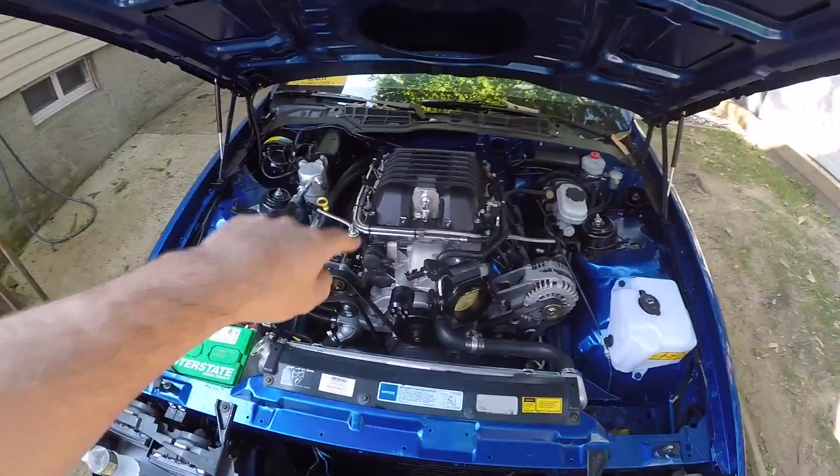Hey guys, welcome back. So today we're going to continue with the blower installation by installing the LSX Concepts race drive. A few other things I did since last video.

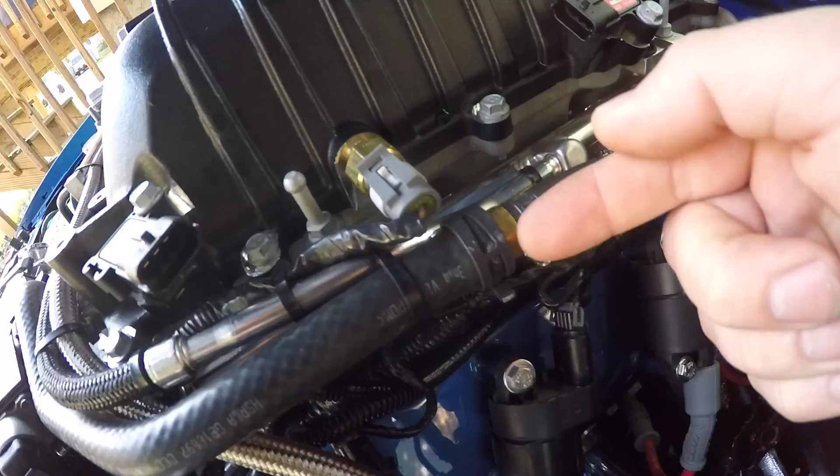I went and hooked up the brake booster vacuum line, as well as got a heater hose for that one in the back that was hitting the blower. For the booster hose, I'm actually using a stock ZL1 brake booster hose. The ZL1 side is a 1/2-inch hose, and then I stepped it down with a little adapter here to the 3/8 3rd gen size.

For the heater hose in the back, I went and picked up a long Gates heater hose with a 90-degree bend on the end. Right where it connects to the firewall, there's a 90 molded into the hose, and that clears the back of the blower.

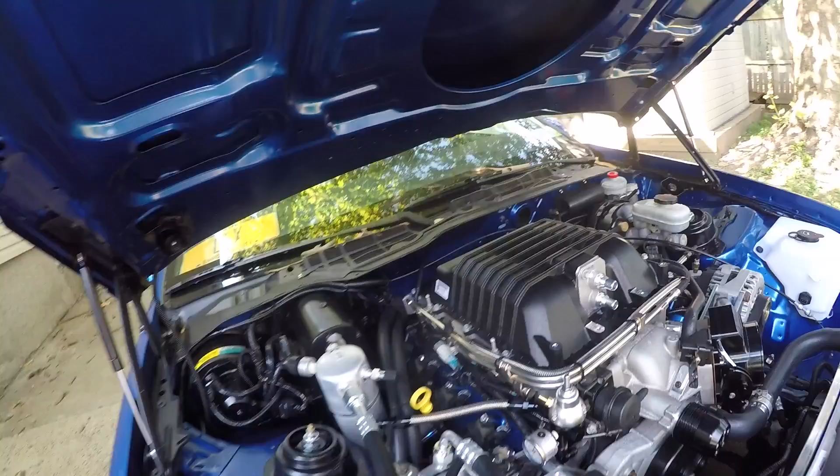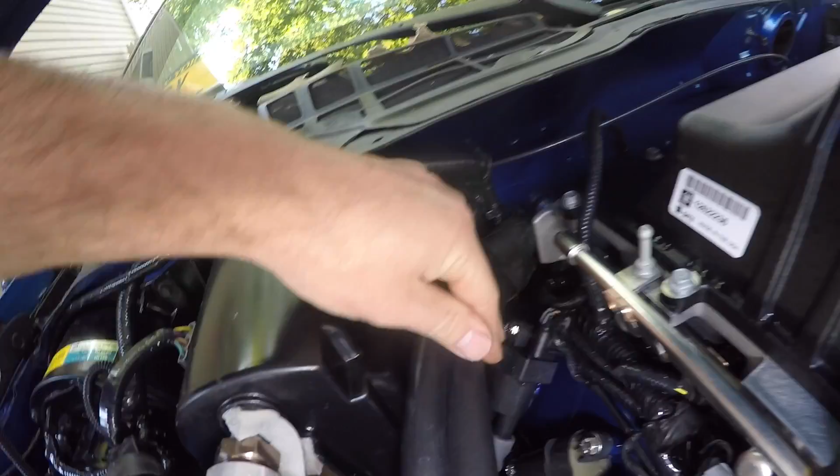It's a little tight on the other side still, it's just touching the blower. If I pull them off, they won't be rubbing anymore. So I'm going to see if I could get one of those band clamps and wrap it around here, and screw it into the side of the evaporator just to pull them over. But for now, I just put some friction tape around it to prevent any chafing.

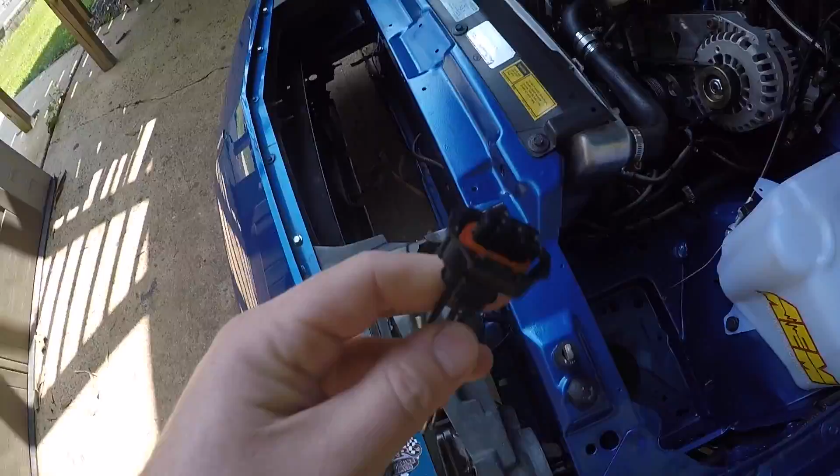Then I also got my new throttle cable in. We're going to be installing that, as well as wiring in the 3-bar map. I just got that pigtail there, and I'm going to cut the 2-bar connector off, run it around the back, and solder it to the new connection.

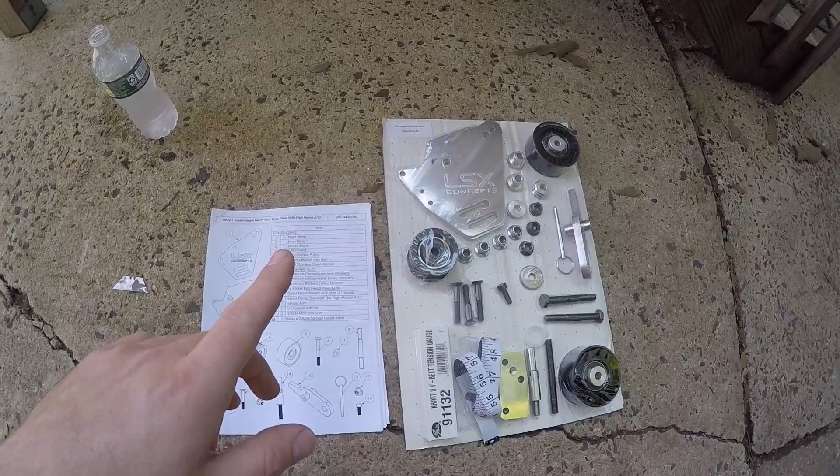All right, so let's take a look at the blower drive. Now this is a race drive from LSX Concepts, meaning the actual tensioner for the blower is fully adjustable, so you're not just relying on a spring tensioner like the factory setup. So you'll be able to adjust for any difference in belt size, and really tension it down, as opposed to a regular spring tensioner.

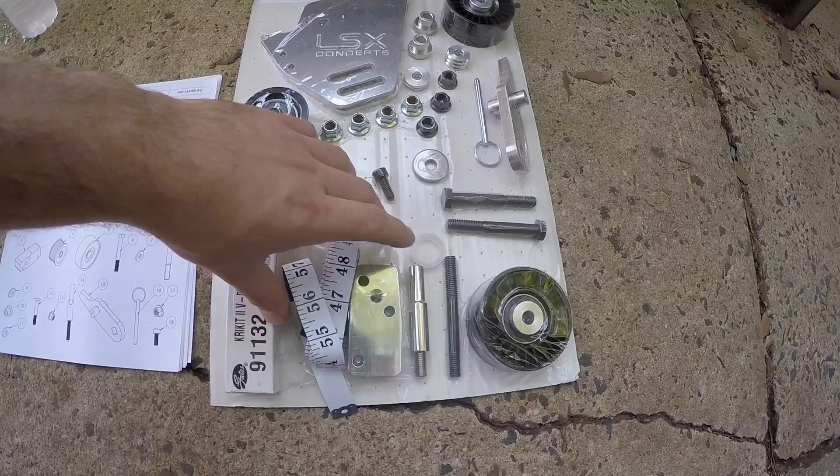Pretty much whatever the spring is set to is what you're going to get. You're really going to have to try to go with a short belt and really squeeze it on there if you want more tension out of it. But the kit comes with a belt tension gauge, and it comes with a tape measure, so you could go and measure for a belt.

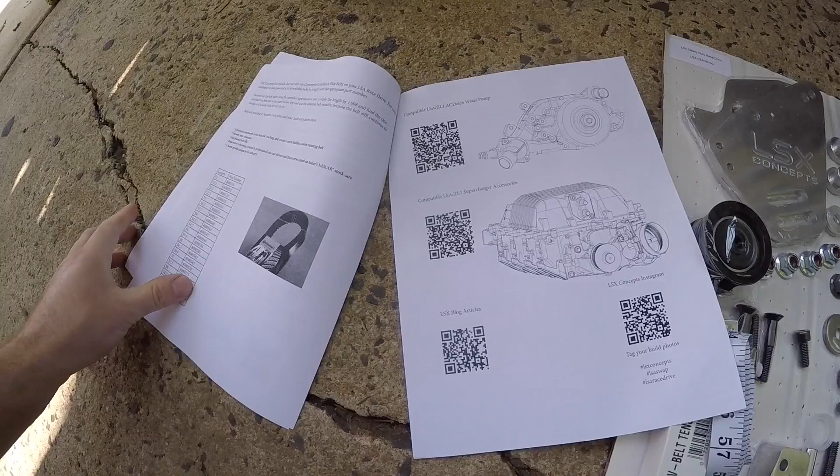The kit doesn't come with a belt because there's just too many variations on what size you're going to need. There's a little chart in the back of the booklet that has all the part numbers depending on which size your belt turns out to be.

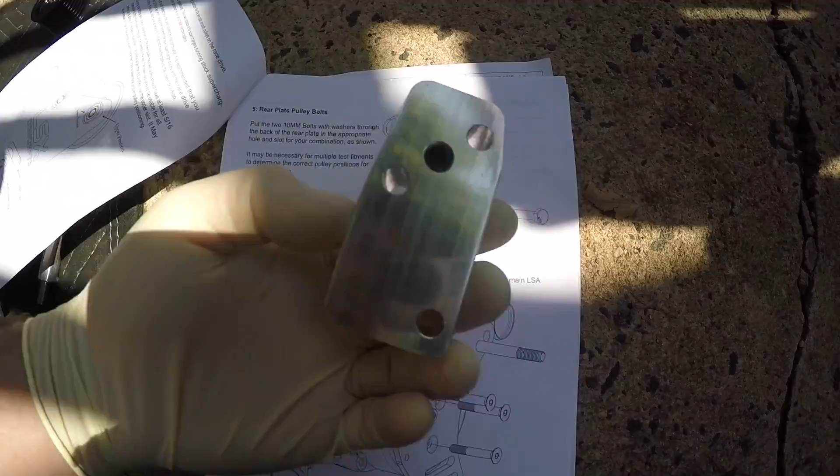Getting started on the installation, first step, it looks like we're going to be installing this stud over here into the actual water pump, and then after that we're going to put the backing plate for the pulleys onto the water pump as well. You can see it has this plate, and then there's this spacer that goes behind that, that actually goes to the water pump, I guess, to space it out.

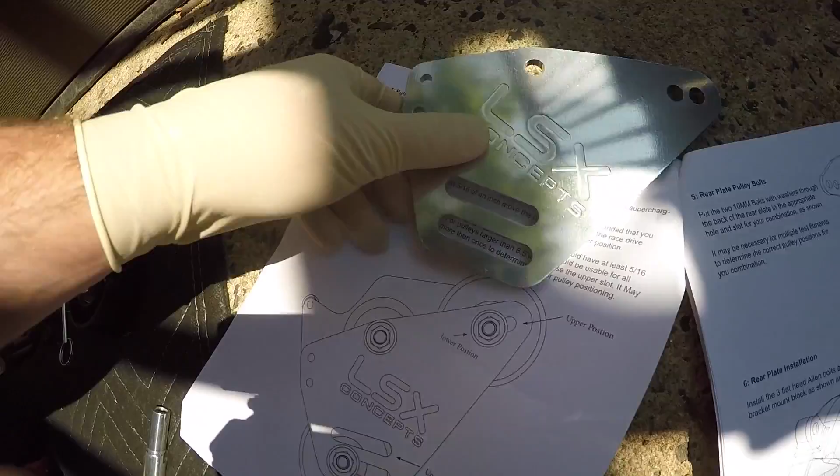But one thing they noted here is the pulley position. Now they have an upper and a lower slot in this front bracket for the pulley. If you're running an overdrive pulley, you're going to be mounting your pulley in the top slot. If you have a stock size pulley, it's going in the lower slot.

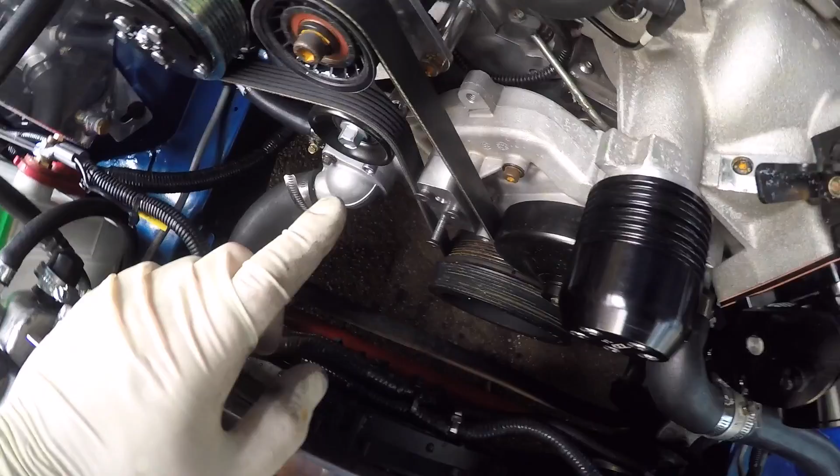Alright, so I ran into a little problem. Trying to get this front bracket on with the spacer in the back, I can't get both of these bolts to go in. I could get one in, but then the other one doesn't go in. After playing with it for a while, I took the front of the bracket off and just put the block on here, and I got them to go in. They go in a little bit tight, but they do go in all the way down.

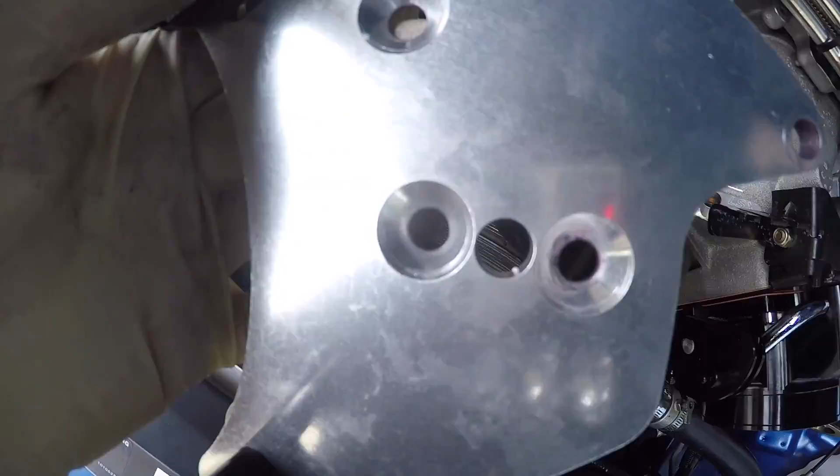So I think the problem is with the front bracket here. What I decided I'm going to do is just drill out these holes a tiny bit, because I think they're too close together. So once it's going through this, the bolts are kind of just going off sideways a little bit. Once you get one lined up, the other one just doesn't, because if I put one in and try to put the other one in, it doesn't even start to get into the threads. It's off by a lot.

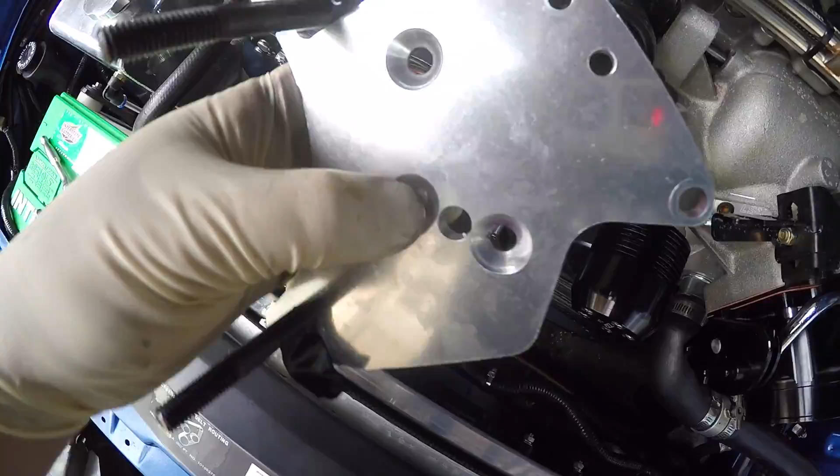So I'm just going to open these two up a little bit. It shouldn't affect the mounting of it, because you can see they have this bevel. Once that's sitting in there, it's not going to matter how big the back hole is, because the head of the bolt is going to be countersunk, and that's going to keep this from wiggling. So I'm going to drill this out quick and see if I get it on.

All right, so I went and put this on the drill press, and I just opened these up one step with my Christmas tree bit, just to make them a little bit wider. This is going to allow a little bit of movement going through this plate, so it should let me get all the bolts lined up going through the water pump.

Oh, also just a tip - the first step after putting that stud on, you have to pass these bolts through. I went with the top slot, being I am running a smaller pulley, and then this other one goes here. But this is a real pain in the ass trying to get this on here. These bolts keep falling out, so I just put a little electrical tape around here, and that's going to keep them from falling out while you're installing them.

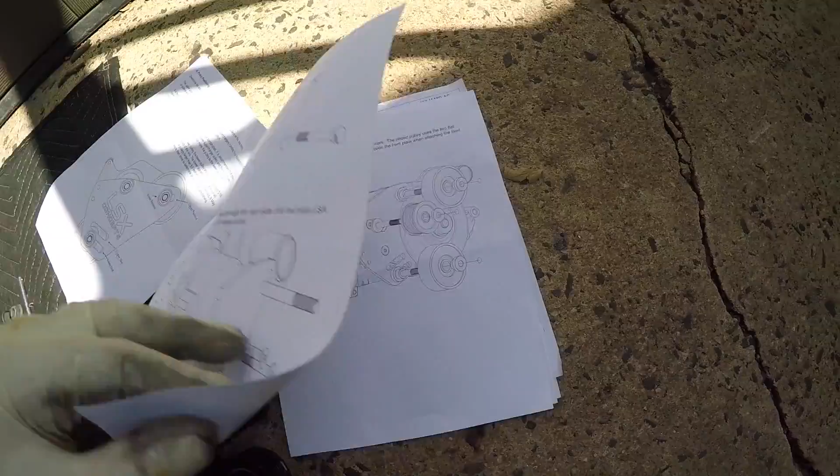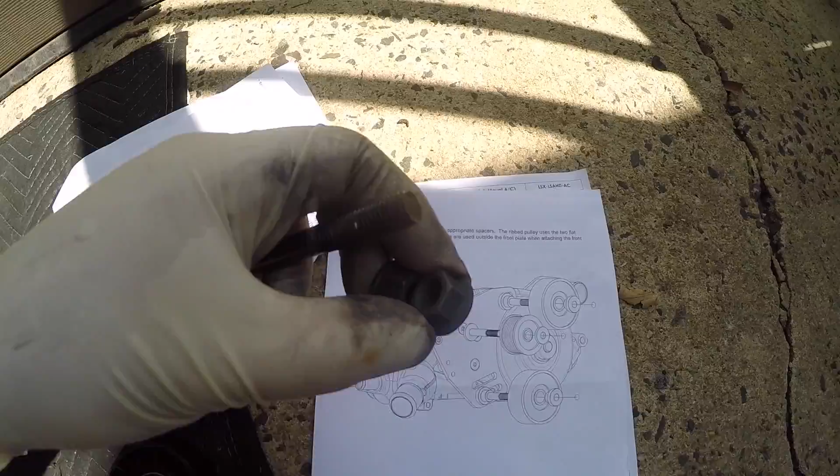Alright, so with the backplate installed, next step is going to be installing the pulleys. Now they give you this little stud here - this is what's going to be holding on the ribbed pulley, and they tell you in the instructions to use these nuts they give you as a driver. So just kind of put them on the end as you would do with like an exhaust stud, and then that's going to allow you to screw that guy in right there.

Alright, and just like that, the installation is pretty much complete. According to the instructions, these bolts here - they give you these three kind of like steel flange nuts. These are for when you're mocking it up, so I guess you're putting the belt on with this off, and then you're going to put this cover on after the belt's on. So these just come on and off of here really easy, and then for final installation, they give you these lock nuts, which are going to be going on there.

And for the actual tensioner, they have this little arm here that goes through with this pin, and then if you can see, you put your half-inch wrench on here, and as you pull this, it slides the pulley over, and that's what puts tension on the belt.

Alright, so with everything installed, I'm ready to measure for my belt. I'm using the tailor's tape they provide. This is what our final belt routing is going to be. So I just went and taped the tape to the upper pulley here. Now I'm just going to route this under as if I was running my belt.

Now, when the belt's going on, this bracket's going to be off, just because obviously your belt isn't going to be cut in half like the tape measure is. But routing this, we're going to go - I'm going to just fish it in here over the tensioner, make sure it stays flat.

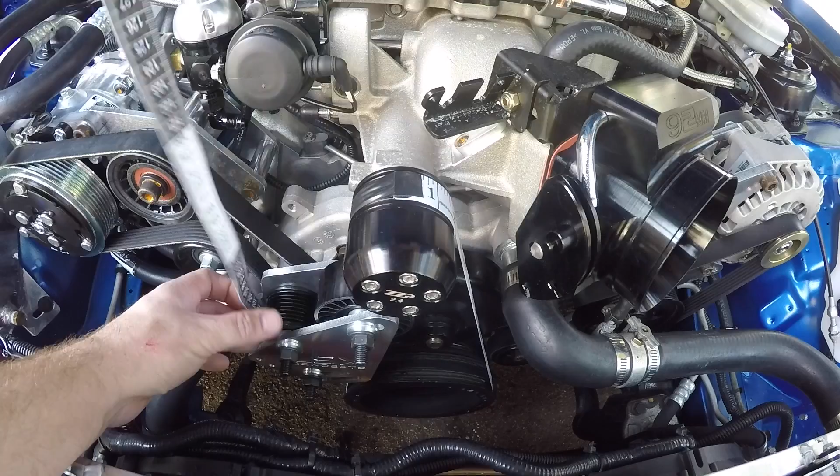Okay, we're on the crank. And then we're wrapping over the ribbed one and then going underneath the other idler and around and back up. But it looks like we are right at 52 inches here.

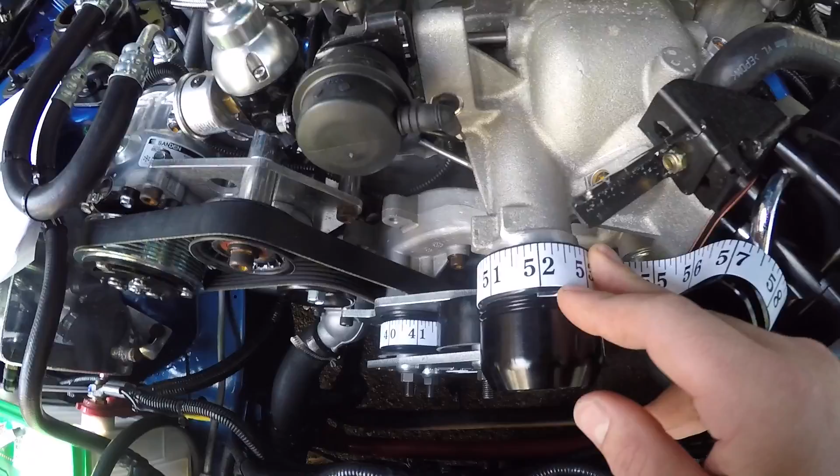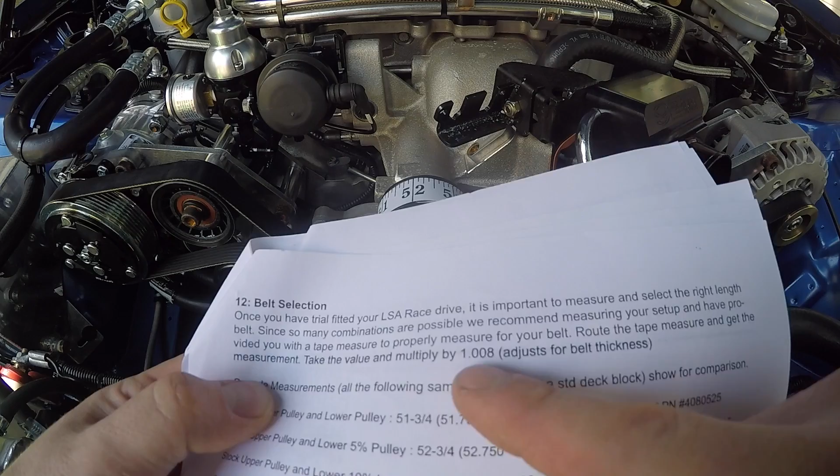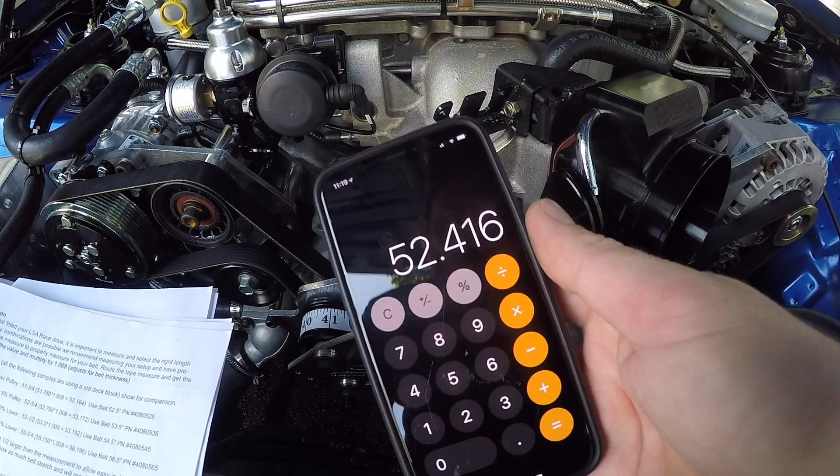Now we're going to go over to the instructions and see what they say about that. All right, well, one thing to note in here - with whatever measurement you get on your belt, you're going to want to multiply that by 1.008, and that is going to make up for the belt thickness. So right now we have 52 inches, so that's going to be 52 times 1.008. All right, so we got 52.4, basically 52.5 inches.

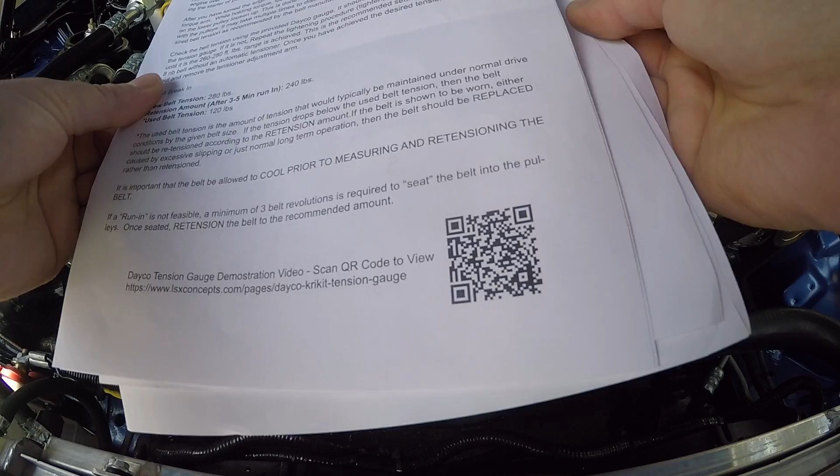All right, well, it says here belt length should always be a half inch larger than the measurement to allow easy installation. So it looks like I'm going to be looking for a 53-inch belt. 52.5, 53. So it looks like I'm going to have to go pick up a 408 0530 belt. So I'm going to go order that belt.

In the meantime, while we're waiting for it to arrive, let's get started on installing the throttle cable. All right, so my old throttle cable is out. And the way I hooked this up, it's been this way since I first did the swap.

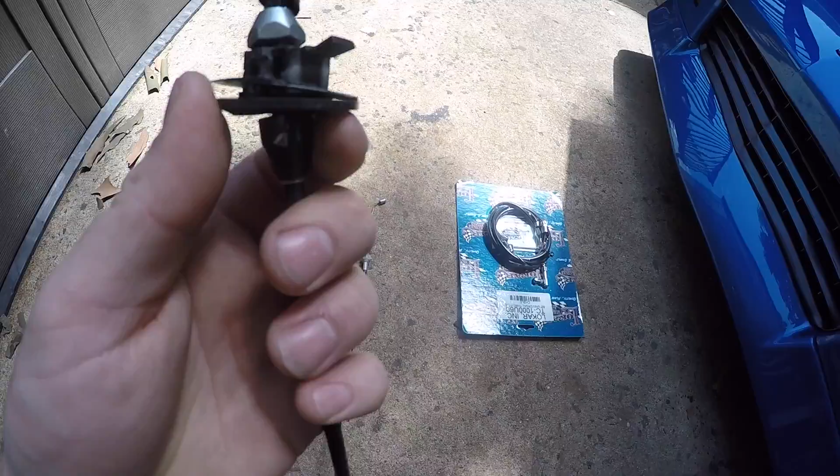I just took the stock 3rd gen throttle cable, cut it out of the actual firewall insert, and then drilled it through so I could fish my new cable through. So all I'm gonna do right now is unscrew this, slide it out of the sleeve here, and we'll install the new one.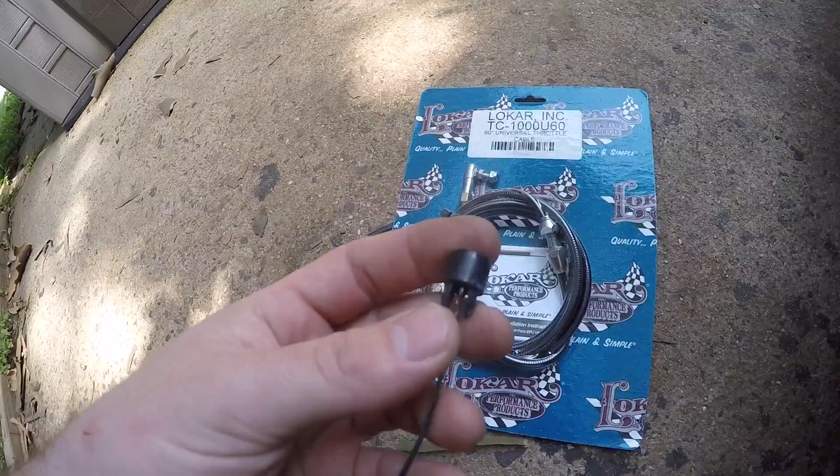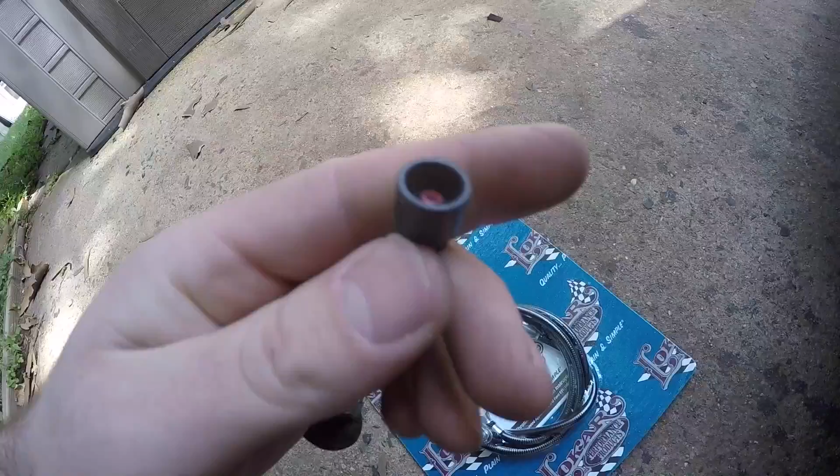I got a 60-inch Lokar cable, but the part on the end that actually connects to the pedal - I'm pretty sure this is the factory 3rd gen clip. When I did this the first time, I had this little piece on the end that clamps on, and this is what keeps the cable clipped onto the throttle body. So I basically just cut this end off, fished the whole cable out of the sleeve, and then slipped this over the cable before I put the end on.

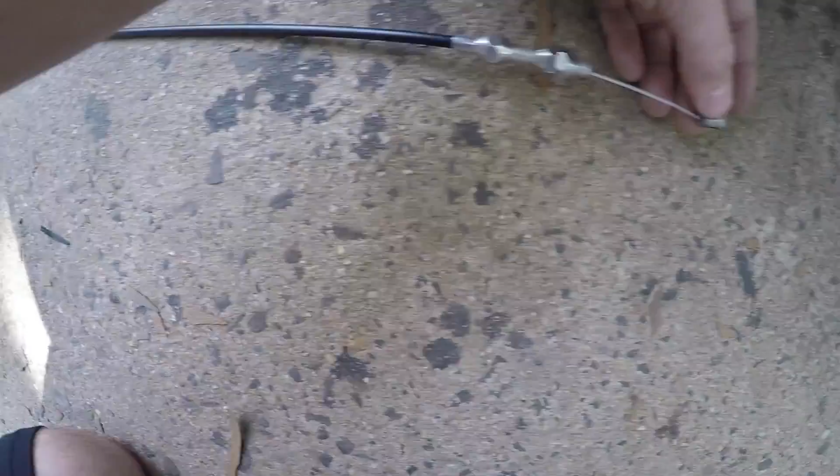All right, so I got my cable made. I just took the firewall pass-through piece off of the old cable, threaded this through. Then the other end, this clamp's just gonna be going back on once the cable's installed and cut to length. So let's go put this in the car. I'll show you how it connects to the gas pedal, and then we'll see if we need to trim it down.

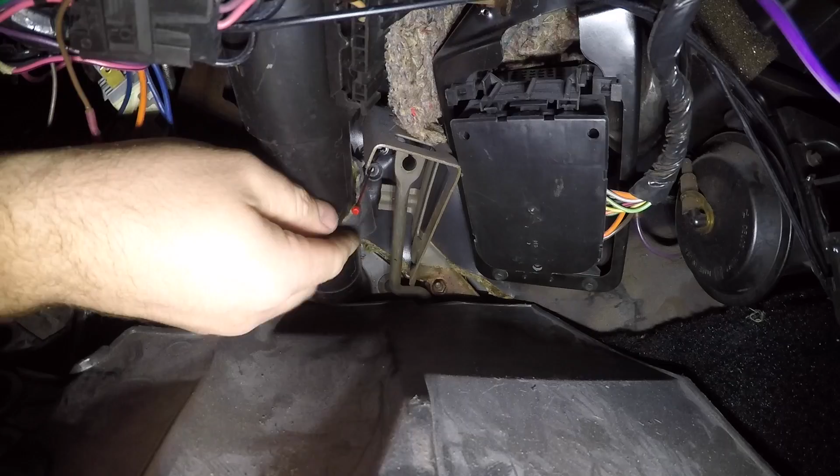Here's the top of the 3rd gen pedal. Here is our Lokar cable with the little 3rd gen clip. All you're gonna do is slip that over, put the cable through the slot, pop that in, and that's it. Your cable is connected to your 3rd gen pedal.

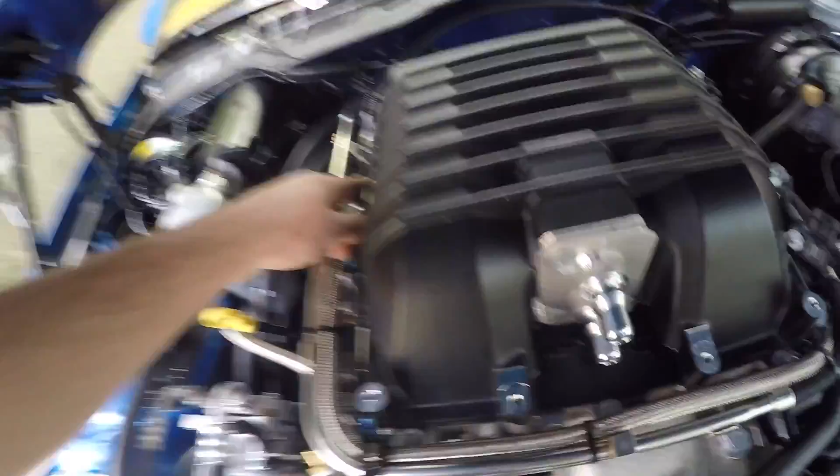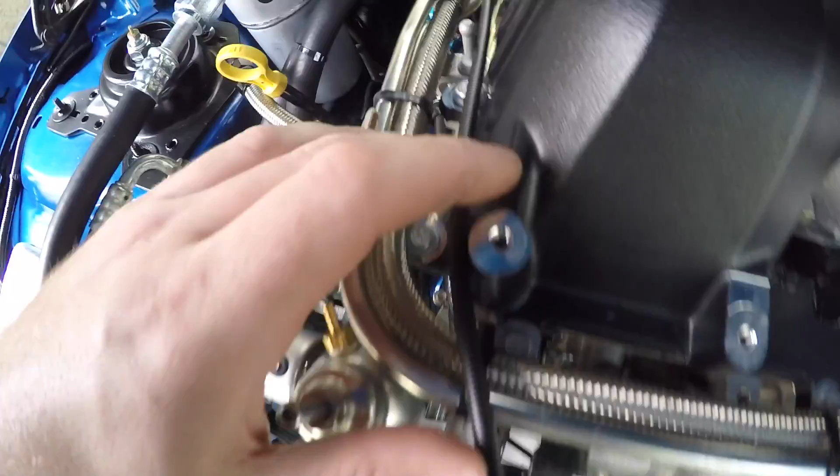All right, so I'm definitely gonna have to cut the cable down. It's a little long, but I think I'm just going to try to tie it down to these studs here that look like for the engine cover. I'll just leave a little slack in the back there, tie it down there. I could probably get like a clip or something in here to secure it, but from there it'll just come over the fuel rail and pretty much connect there.

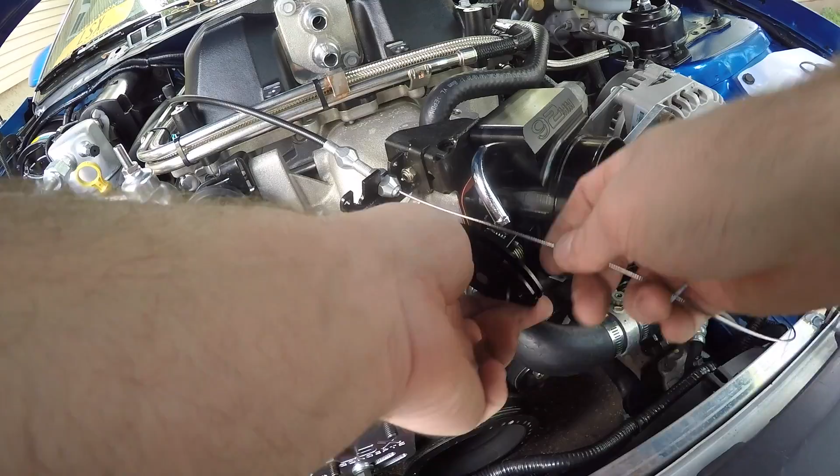So I got the cable ran and hooked up to the bracket. I didn't tie it down yet, but I left enough slack so I could position it the way I want. Just kind of pull on the pedal a little bit, make sure it's not binding up or anything like that. Now, thing to know, when you're pulling on this, the cable's connected to the top of the pedal. So if you're pulling on this cable, you might think you're pulling the gas pedal to the floor, but you're actually pulling it away from the floor, being you're pulling at the top of the pedal.

So to set this, what I do, I back it pretty much all the way off. That's going to allow you a little wiggle room in case you ever have to cut this down a little more. You can always bring the cable forward and you'll have some cable left over. So what I like to do is pull this tight so your pedal is pretty much all the way up, and then just run it through the throttle body to where you want it to go. And then right there is where I'm going to put my little clamp on, and then I'll clip off the excess.

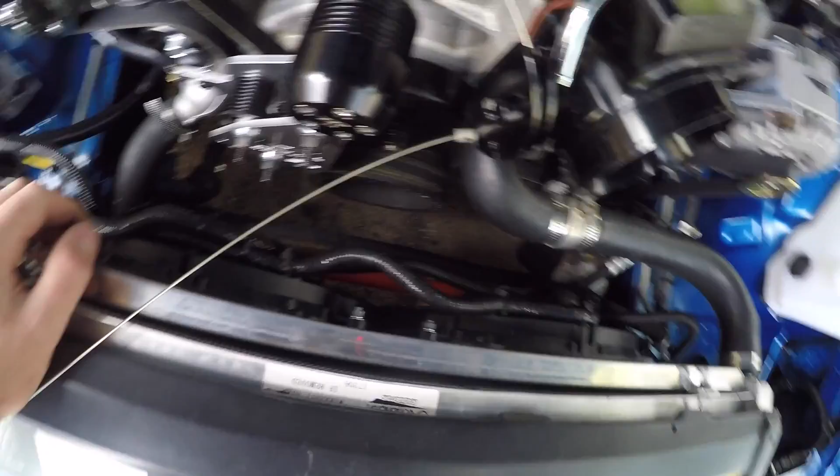So I got the cable end on there. I didn't cut it down yet because I'm not sure if I have to make any more adjustments. But right now I'm just going to go tie down the cable here, because as I'm stepping on it, it's kind of like pulling up. So I'm going to get this all secured, and then go test the gas pedal, make sure nothing's binding up, make sure I have wide open throttle and that it returns all the way. And then if everything's good to go, I'll be able to snip off the excess.

All right, cable's tightened down. I cut the excess off. So what you're going to want to look for when you pull the cable, you want to make sure you hit the throttle stop. And that's going to ensure you get wide open throttle. So I'm going to go in the car, we'll hit the pedal. You can see.

Everything's working great, but I am getting a tiny bit of noise from the cable. I think I'll spray a little lube in here, because at the end where I cut it, it was pressed down a little bit. I should have straightened it out before I put the cable through, but it's probably just getting pulled on that edge. With normal use, it'll wear down and the noise will go away. Just make sure there are no bends or kinks in the cable that could cause it to bind up. All right guys, it's the next day and I just finished the throttle cable.

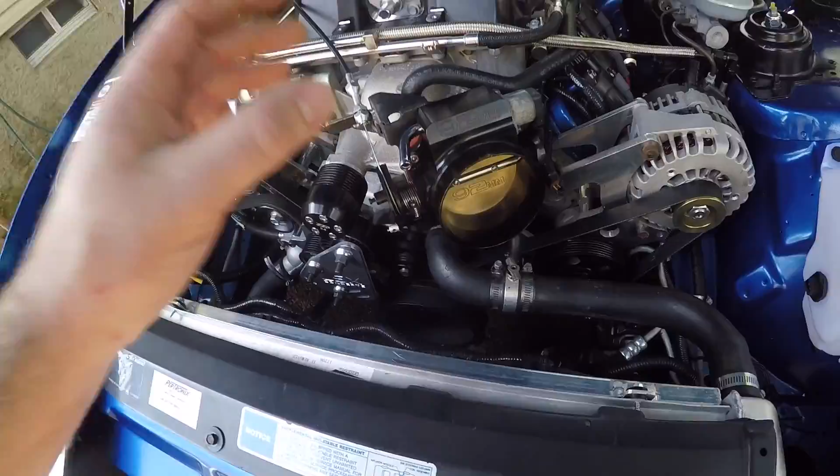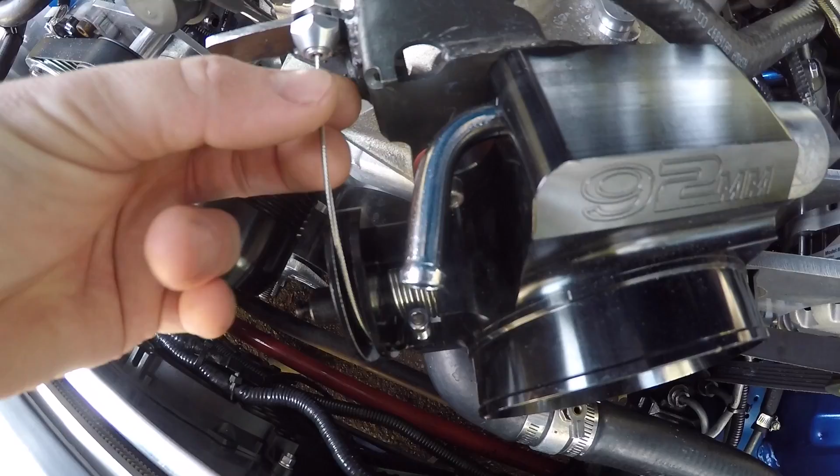Where I left off, I got everything hooked up, but when I was hitting the pedal there was a scratchy, rubbing noise coming through the gas pedal. I found out the way this was mounted before with the little Holley bracket, it was a bit off center from where it's supposed to connect to the throttle body, so the cable was sitting at an angle. Whenever I hit the pedal, it was slipping off to the side and making an awful noise through the car.

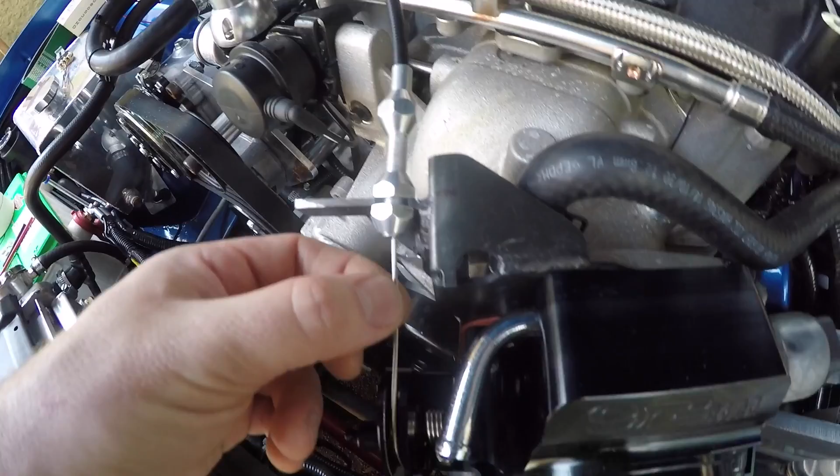To remedy that, I had to take off the piece that goes with the throttle cable bracket, and I ended up making my own. I took a piece of steel, bent it at 90 degrees, put a little support piece at the bottom, welded it all up, and cut a notch. That allowed me to not have the bolt sticking out and weld it directly, so I could slide the nut further over and center it on the throttle body. Now there's no more noise, and the cable is moving nice and smoothly.

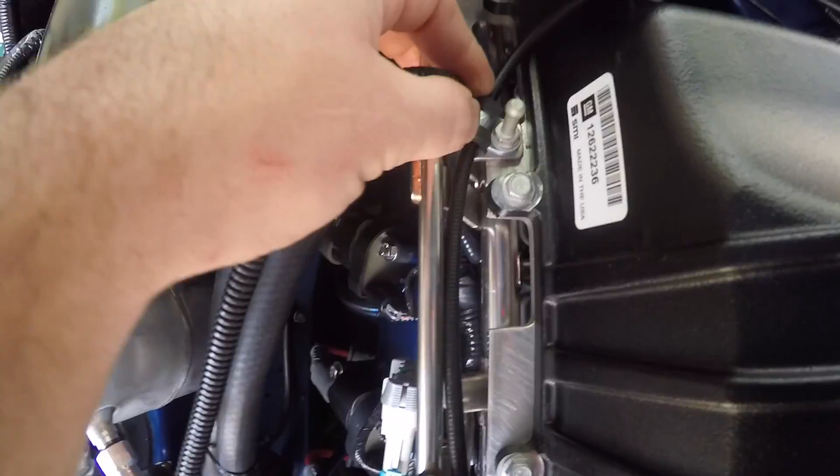So that's pretty much finished. For securing it, I used one of the studs for the fuel rail with one of these little rubber hold downs. For the front, I could pull some slack out of this - I just zip-tied it down for now, but I could pull it forward and either secure it to that one or put another one right through here.

The throttle cable's finished, and I have my blower belt. We're going to get to installing this in a second.

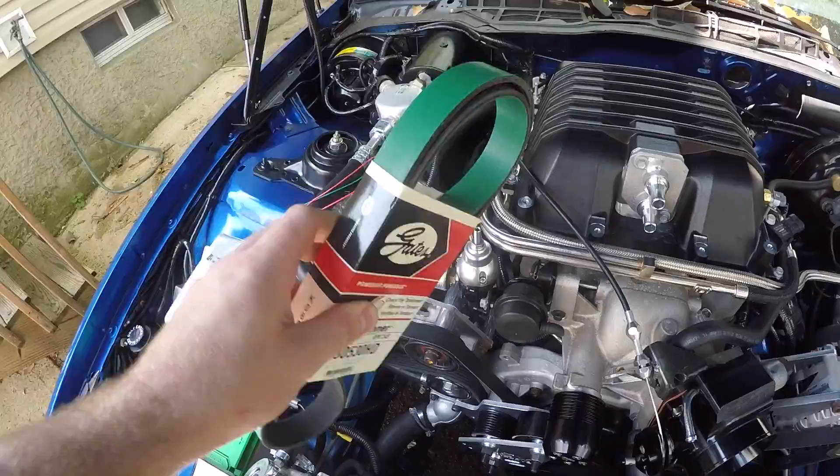What I'm currently working on is extending the MAP sensor. I cut the connector off and soldered in some extension wires, same gauge wire, soldered and heat shrinked, extended them maybe a foot, and that's going to allow me to reach the MAP sensor on the other side.

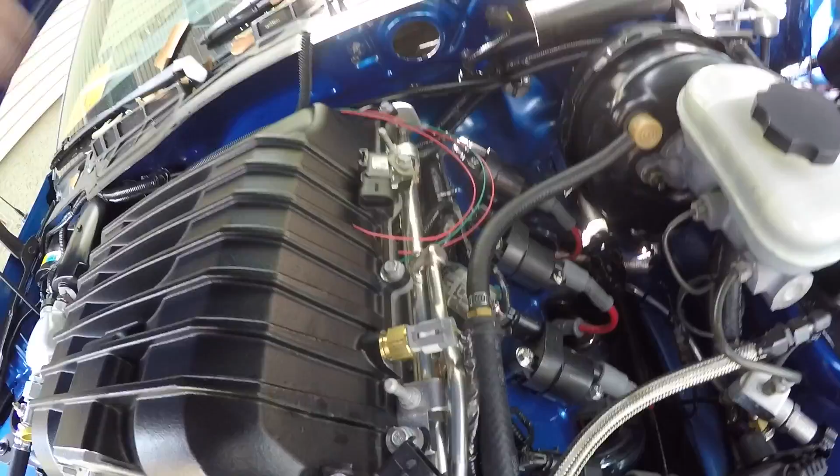The other thing I did was remove the 3-bar and kind of rig my old 2-bar in here. I flipped it, put an O-ring on it, flipped it, and put a washer in to hold it down. It's in there pretty tight, but this isn't staying this way.

My intention is just to run this while I'm driving it - letting it idle, checking for vacuum leaks, and driving it on the trailer - just because it's probably going to run really bad with a 3-bar since it's not tuned for it yet. So this is temporary, and once I get to the tuner, I'll put my 3-bar back in.

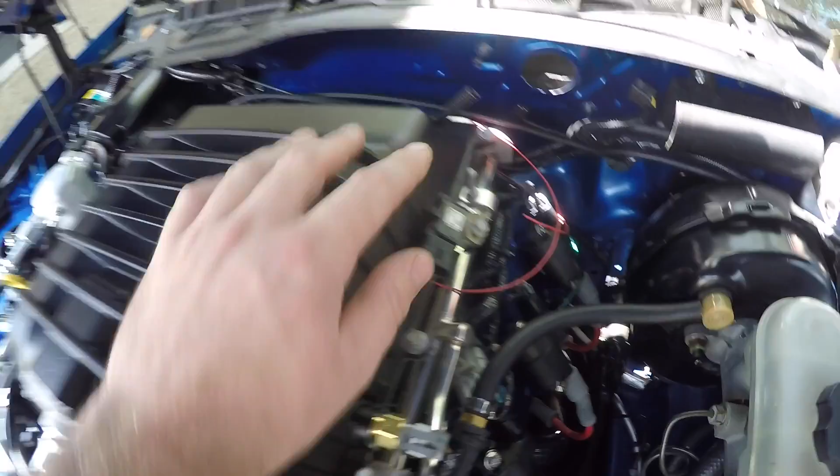One more thing I decided to do in preparation of bringing it to the tuner: I'm going to pull these injectors out because I had 28s in there, and these are 80s. Running this for any period of time isn't a good idea, it's going to dump a lot of fuel. I got a set of Delphi truck injectors from a buddy - these are 2003 Suburban injectors, 28-pound injectors, the exact size that were in my car and what the PCM is currently tuned for.

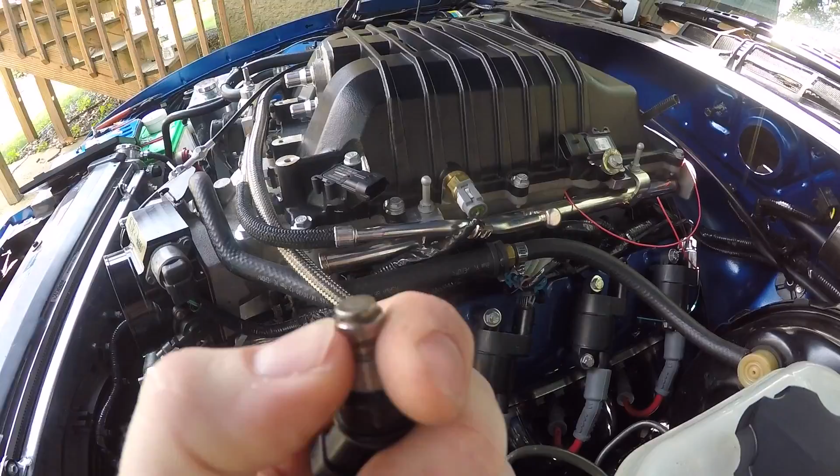I pulled the rail out before and popped one of these in, and they do fit - they're about half an inch taller than the LS3 style injector. All I had to do was take the plastic tip off the injector where it sits in the truck intake, take the O-ring off the LSA style injector, and put it on here. That fit nice and snug, and the rail just clears it. The only thing is I'll have to put some washers underneath the mounting point, since they're a bit taller, so I can secure them.

I'm also going to put some washers under the lid bolts, just these 3 bolts that go along the rail on both sides, because with those injectors in here, this rail is almost touching the blower up here, and it's touching the little bottom nub of the lid bolt sticking out. So I'm just going to put some washers under here to bring that up, and then that's going to be it.

I went on eBay and found a set of LS1 harness to Delphi truck injector adapters for like 20 bucks. I'm going to pick them up so I can plug my harness into these injectors without an issue, which is way safer than running the car with the 80 pounders. Then, just like the map sensor, once I get to the tuner, I'll pull the injectors out and put the 80s back in.

All right, so I got my map sensor all temporarily wired in, that's ready to go, and I just finished up the fuel system. What I ended up doing is I have my feed coming off of the hard line there, then I routed that on the inside of the rail, tucked it nice and neat. Then it comes over to this T and continues over to the rail. The purpose of that T is to relieve the pressure through the regulator, so that's running down into the bottom of the regulator. Whatever pressure the regulator is set at, the excess fuel comes out the side and goes down to the tank. So this is all set up good to go.

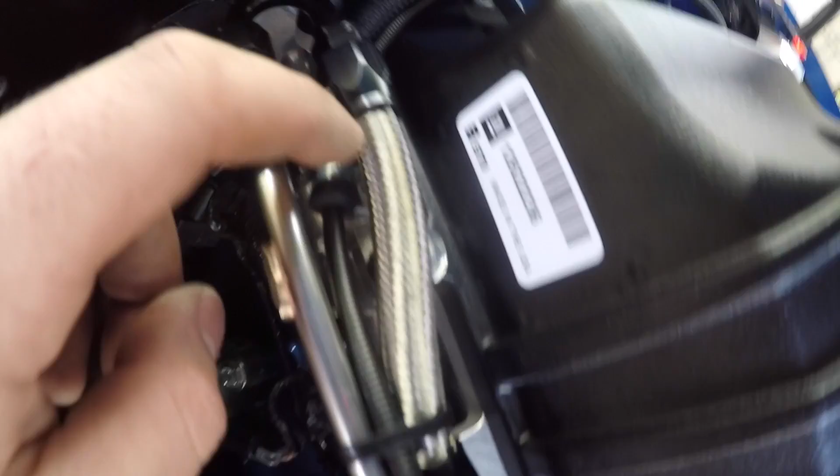The only other thing I had to do was swap out the back fuel rail bolt. It has these little studs for the LSA cover, so I swapped it out with one of my old coil bolts, just so this could sit sideways and tucked. Otherwise it was sticking straight up.

The reason I went with this T was solely because I kind of bought the wrong regulator. This is an MSD fuel pressure regulator, but what I didn't know at the time is it's meant for MSD EFI, like carb retrofit fuel injection systems. So it's pretty much designed solely for that system, not really a universal kind of regulator. It still works, but it would've been a little easier if I got a regular Aeromotive one. On a traditional regulator you have 2 inlet sources and then 1 outlet. This one's reversed.

You have 2 outlets and 1 inlet, meaning the fuel comes in through the bottom and goes out through the top. There's 2 ports here, but this is solely just for mounting purposes. So if you have this on the other side of the car and want your return coming out the other end, that's the only reason why they made 2 holes. You can really only utilize 1 on the top.

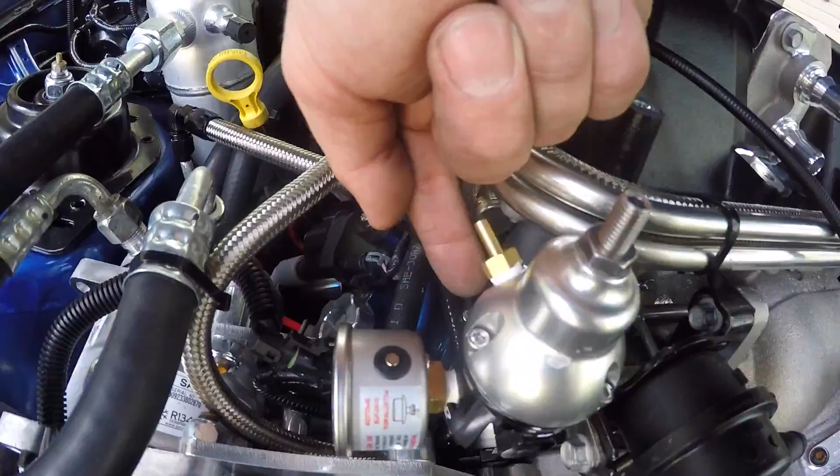I had to have my fuel source coming in through the bottom here through this T, and then it's getting regulated and going out this way. If I had a regular Aeromotive kind of regulator, I would have just run the feed into the side and it would've come out this way, 90'd it up and gone straight to the rail. I wouldn't have needed this whole fitting here. I could have returned it and swapped the regulators, but I got this mounted so perfectly, the hole drilled in the hood and everything lined up, that I didn't want to restart and go with a different regulator. But this works, it looks neat, I'm happy with it.

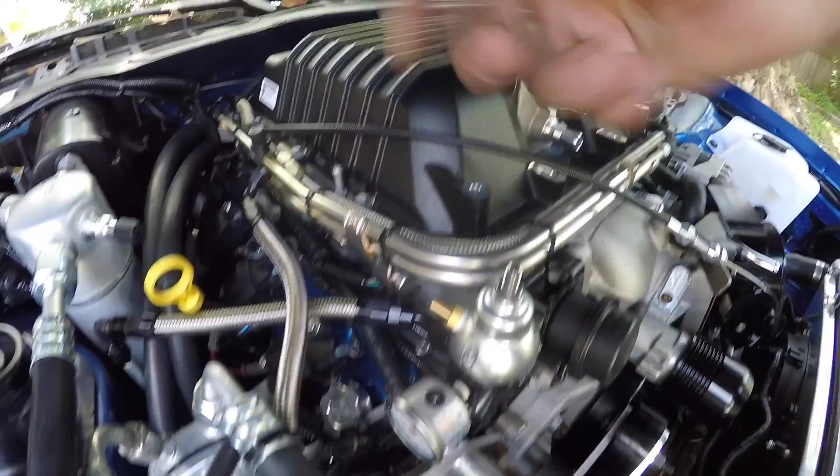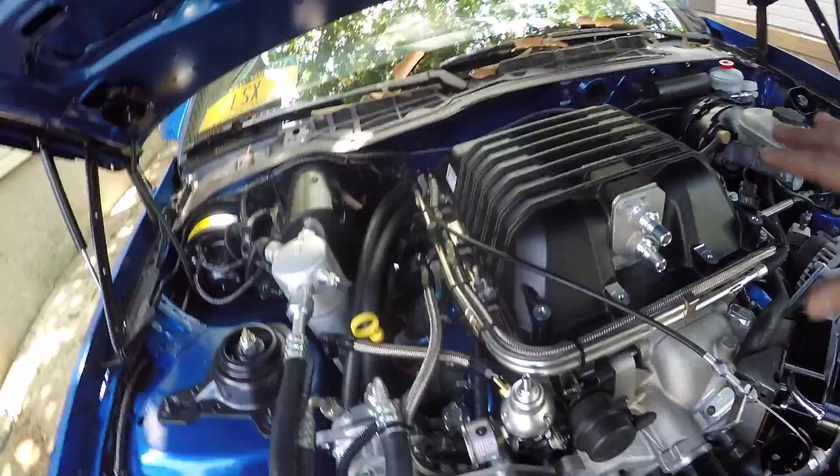I went ahead and set the pressure to about 60 PSI, just as a rough base setting. I played around with it, priming the key until I could get a constant 60 while the pump is priming. Once it's running, it'll have to be dialed in a little more, plus I still have to hook the vacuum line up for when it's actually making boost. But this is all set up, nothing's leaking, fuel system is 100%.

So that means the next step is going to be putting the belt on, and then we'll be able to start it up.